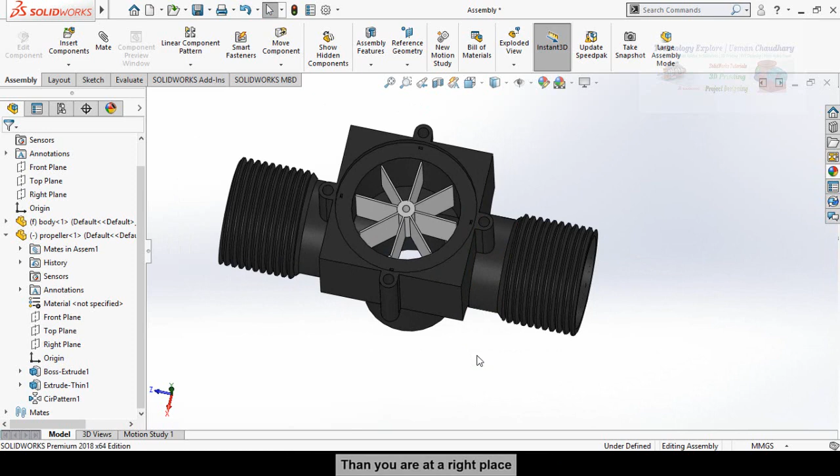My name is Usman Chaudhary, and in this video I am going to design this type of water flow sensor in SolidWorks. I had received a message on my Facebook page from a friend who wants me to make a tutorial on this topic.

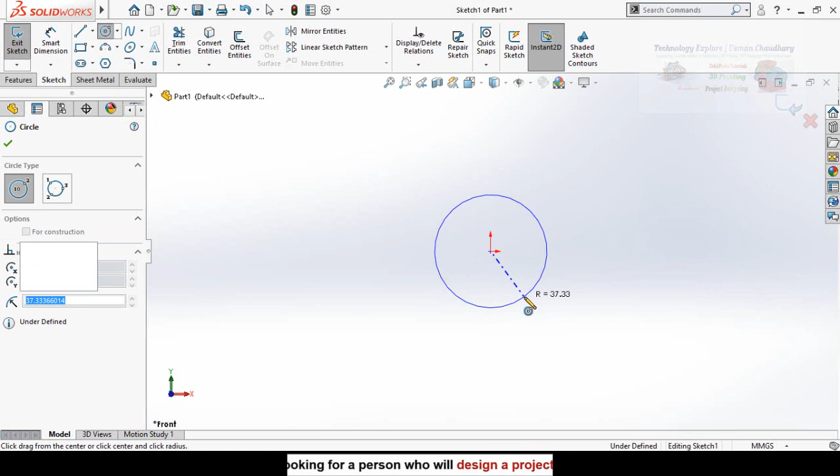Now define it, and let's say its diameter is 30 millimeters. Then go to the features tab and extrude it, up to 80 millimeters, or 100 millimeters.

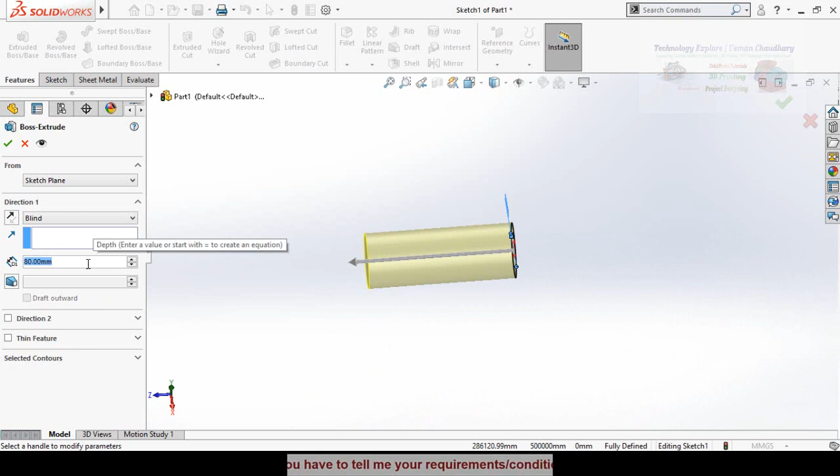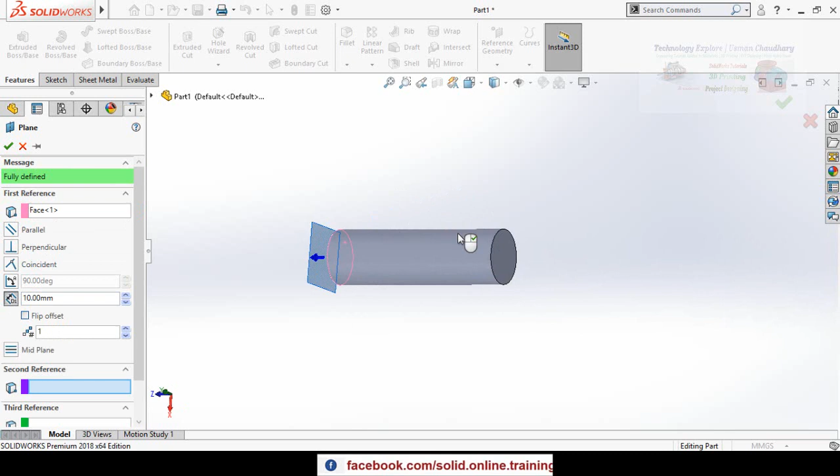Now go to reference geometry and then plane. At this moment I am going to create a plane in the middle of both these faces. First select this face as a first reference, then select this face as a second reference, then press OK.

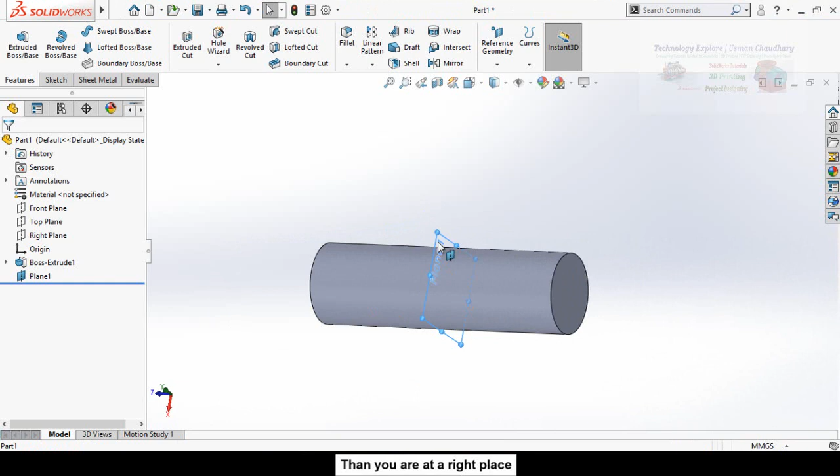Now I am going to make this cut. There are many ways to make this type of part or design this part in SolidWorks, but I will make it my own way.

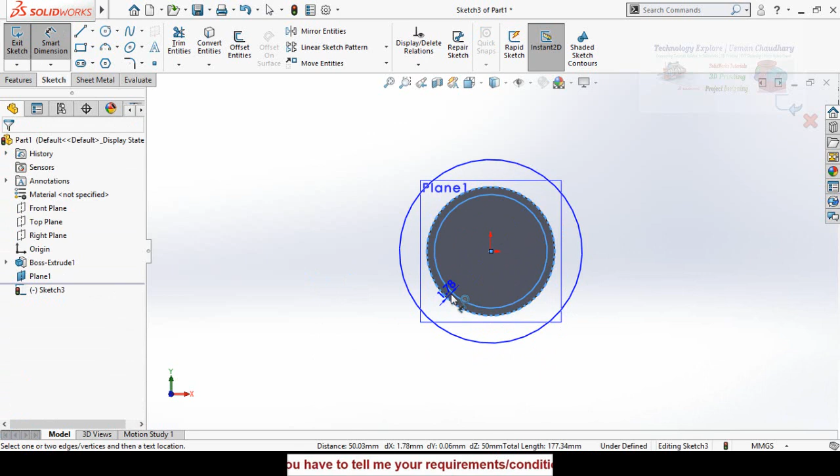So sketch on this plane 1, then make it normal, and draw two circles, one like this and the other like this. Define the internal circle as the distance between the circle and the solid part, and it should be 2 millimeters. Then define the outer circle, and it should be greater than the solid part, so instead of 30 type 35 millimeters.

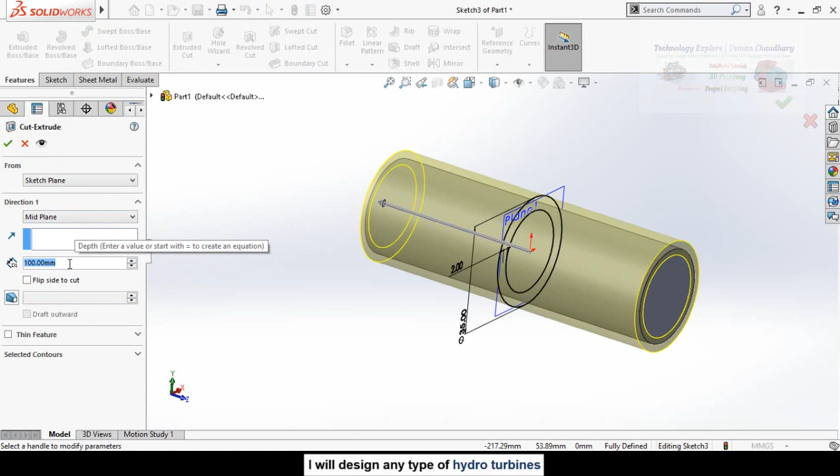Now go to the features tab and select the extruded cut command, then drop down these options and select mid plane. Type here the distance, and it is 60 millimeters. Then press OK. Now you can hide this plane.

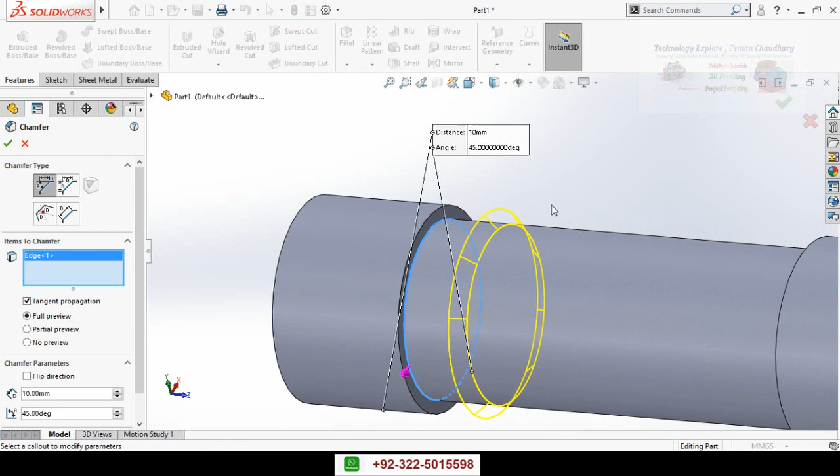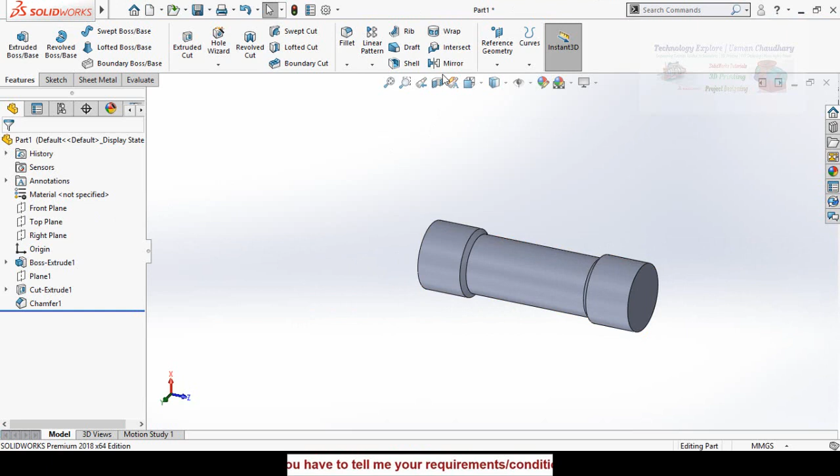Next step is to make this box. Initially I will make it a solid part. Go to SolidWorks, then click on reference geometry and then plane.

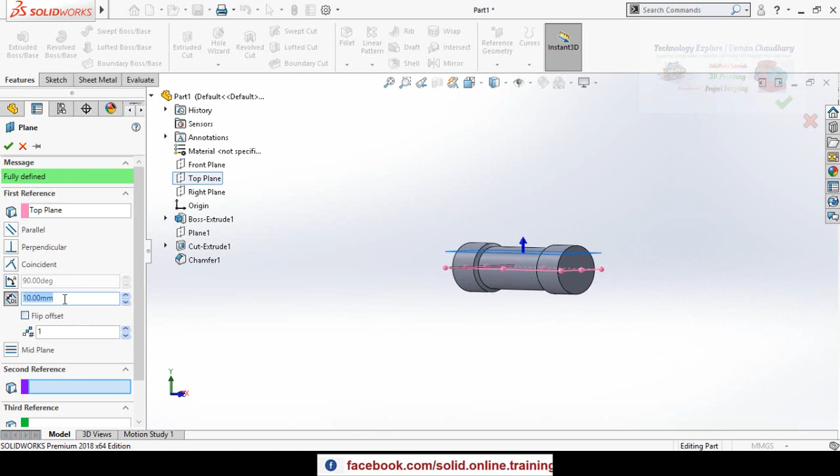Expand this tree and select the top plane as the first reference, then type the offset distance, 10 millimeters, and press OK. Now sketch on this plane 2, and make it normal by pressing Ctrl+8 on your keyboard.

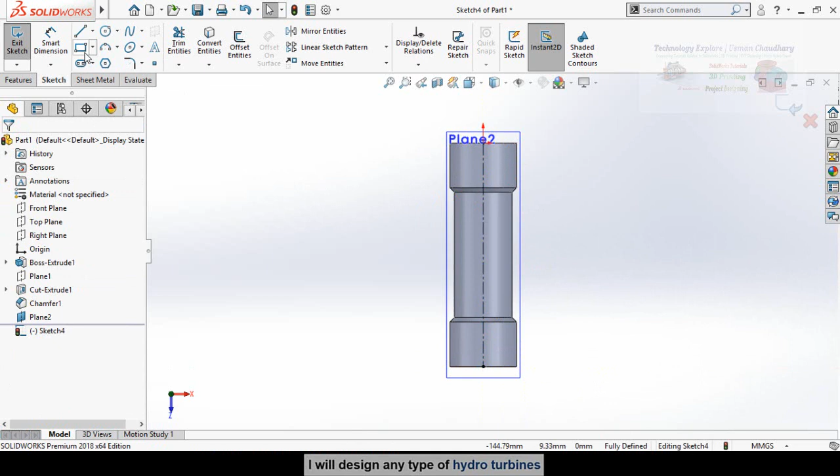Draw a center line, starting from the origin up to this line, then press escape. Now click on the arrow in front of the rectangle command and select center rectangle. Start it from this midpoint like this. As we can see in the picture, all these lines are equal, so it is a square.

Go to SolidWorks, press and hold the Ctrl key, select both of these lines, and make their relation equal. Now again define this line as 40 millimeters. So you can see our sketch is now fully defined.

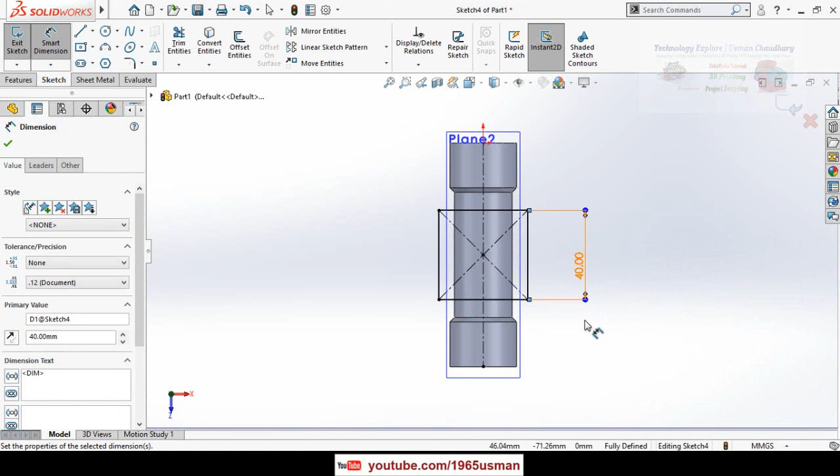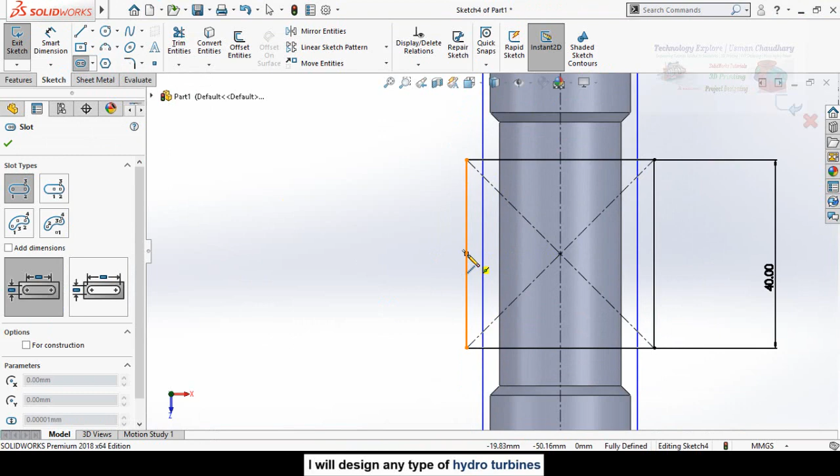Now we have to make these slots on all four sides. For that, select straight slot, zoom in, and draw a slot like this. A similar slot on this side, again on this side, and also for this side.

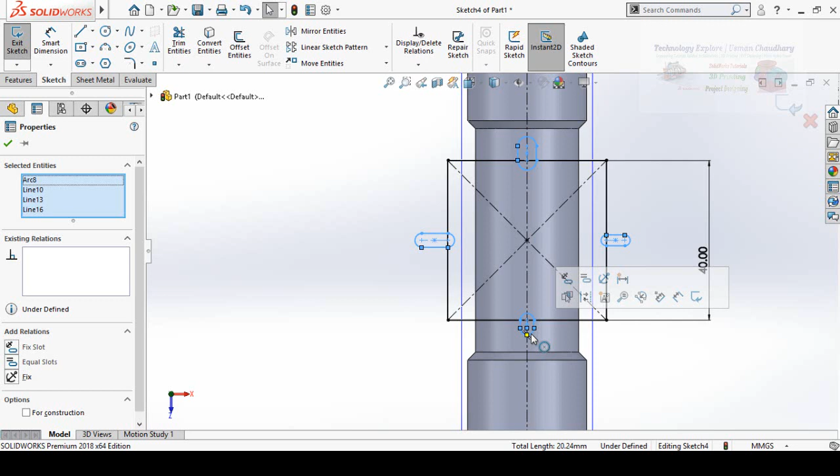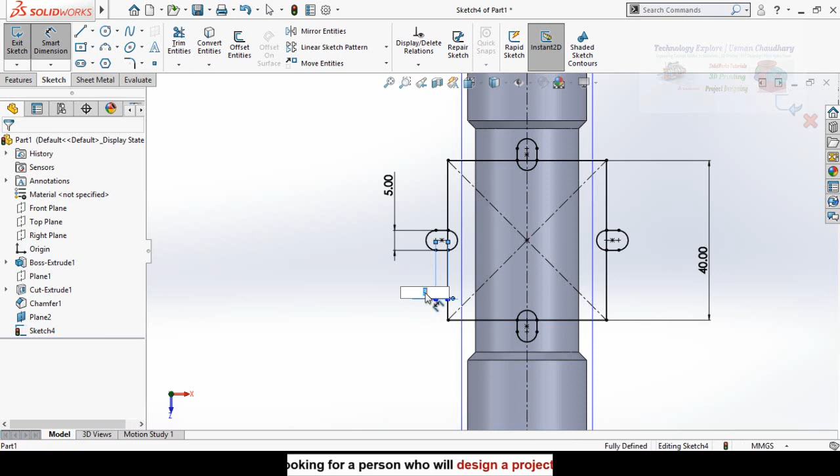Now press escape. Select all the slots one by one and make their relation equal. Then define them as 5 millimeters, this distance as 3 millimeters or 2 millimeters. Now select the trim entities command and trim like this.

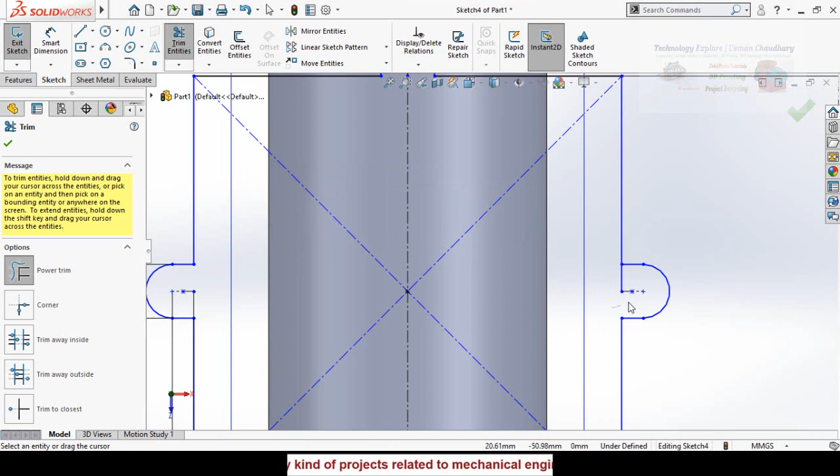Now press OK button, then go to Features tab and select Extruded Boss Base command. Reverse the direction by pressing this button and type the extrusion length to 5 millimeter. Click on this plane 2 and then hide it.

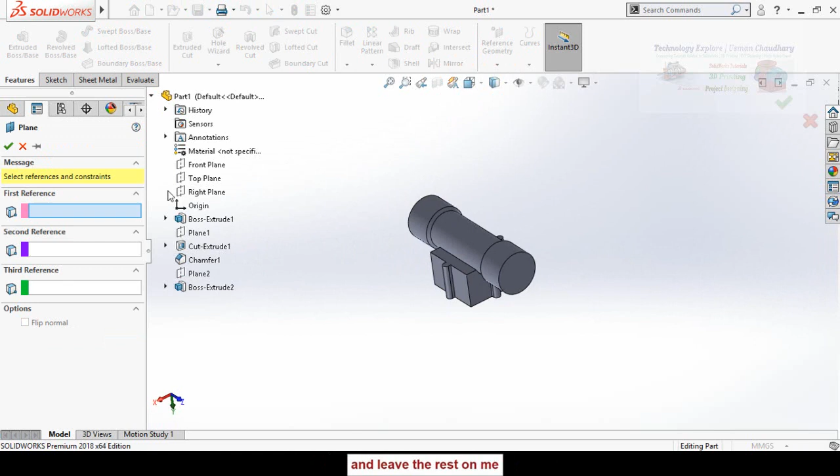Similarly, we have to make another plane on this side parallel to the top plane. For that, click on Reference Geometry and then select Plane. Expand this tree and select top plane as the first reference. Flip offset and set the offset distance to 30 millimeter. Then press OK button.

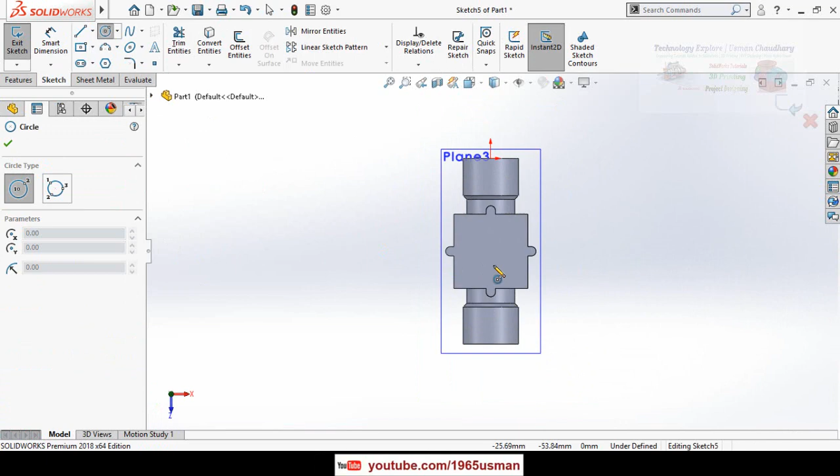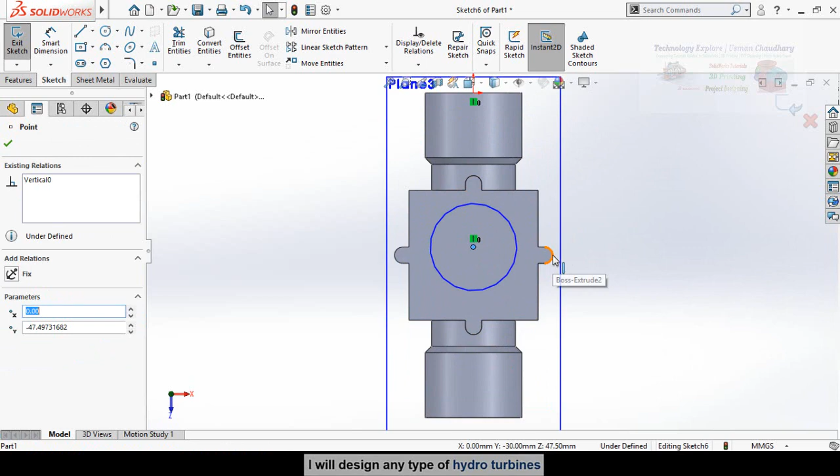Now sketch on this plane 3, make normal to it, and draw a circle like this. Press escape, select this center point and the origin, and make their relation vertical. Again select this center point and then this center point, make their relation horizontal. Now define the diameter of the circle as 26 millimeter.

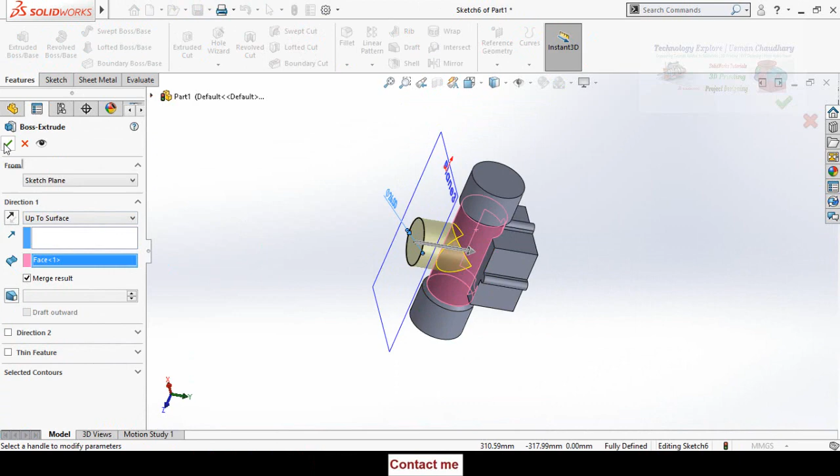Now we have to extrude it. Go to Features tab and select Extruded Boss Base command. Double click on this face and press OK button. Hide this plane 3.

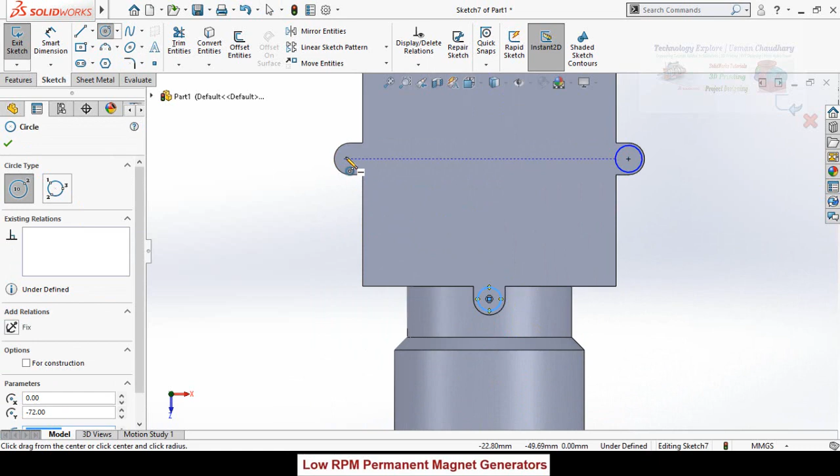So now we have to make these holes. For that, click on this face and sketch on it. Make normal to it and draw circles like this. Press escape, select all these 4 circles, and make their relation equal. Then define the diameter as 3 mm.

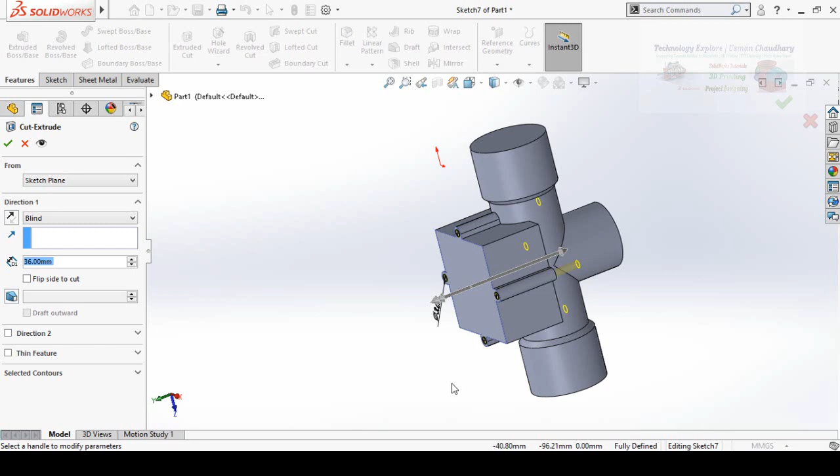Go to Features tab and select Extruded Cut command. Double click on this face and then press OK button.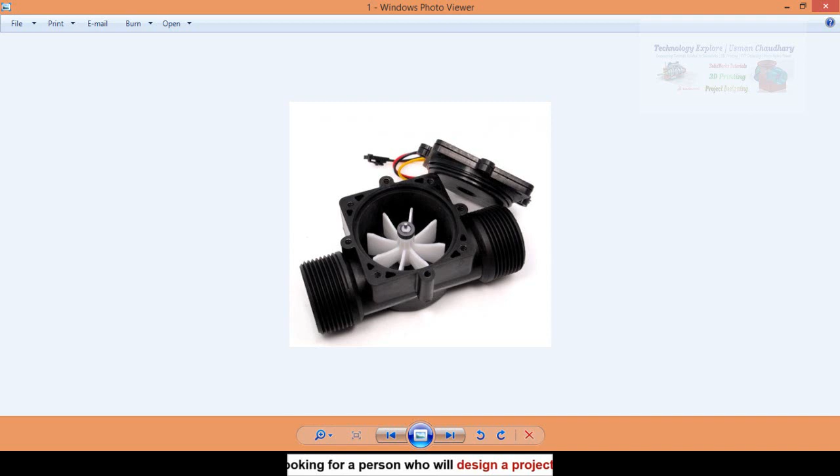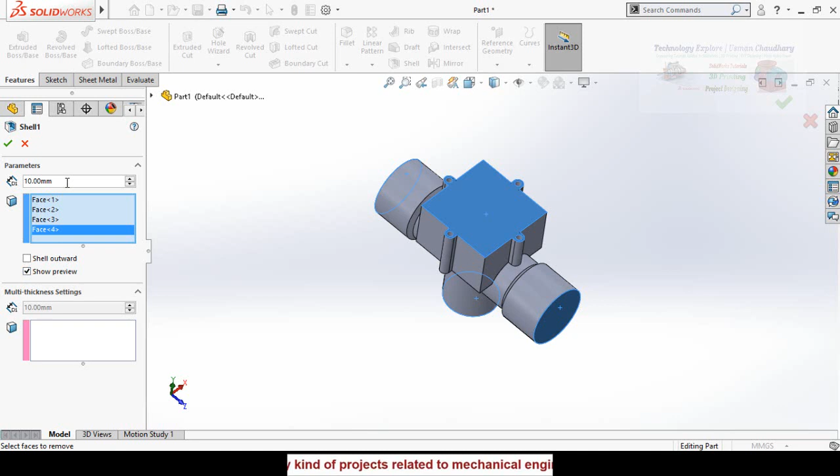Next step is to make this part hollow from inside, just like this. For that, click on Shell command, then select all these faces one by one, and check this box to show preview. Here is the shell thickness, it should be 3 millimeters or 2 millimeter. Now press OK button.

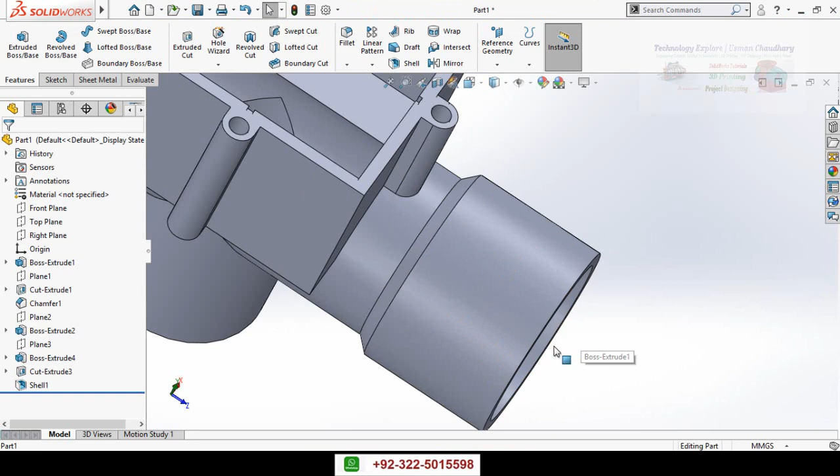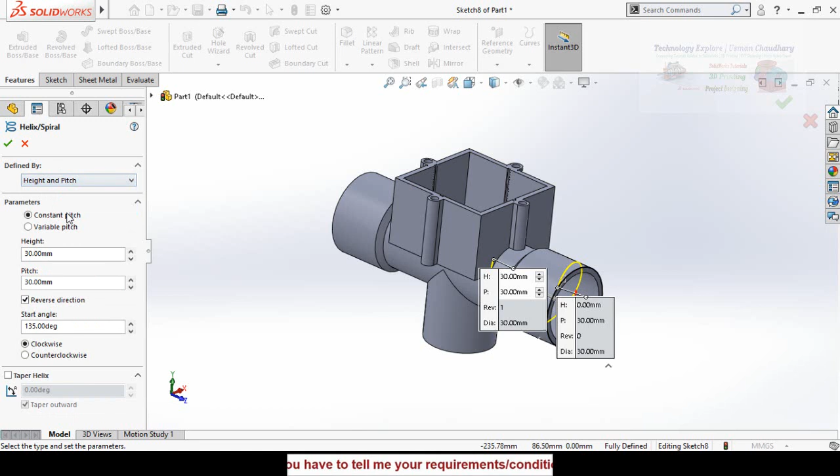Next step is that we have to cut threads on both of these sides. For that, sketch on this face, make normal to by pressing Ctrl+8, and select this circular edge. Then in the sketch tab select Convert Entities command. Go to Features tab and select Curves, then Helix and Spiral. Reverse the direction by checking this box, and from the dropdown select height and pitch. Type height 25 millimeter and pitch 2. Then press OK button.

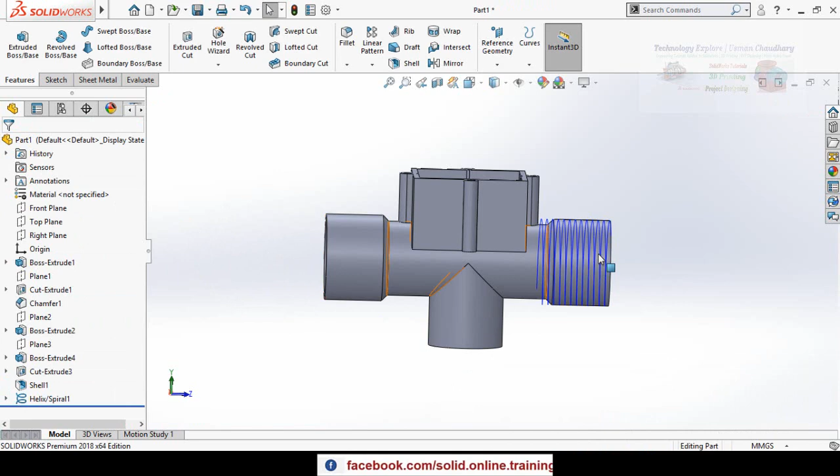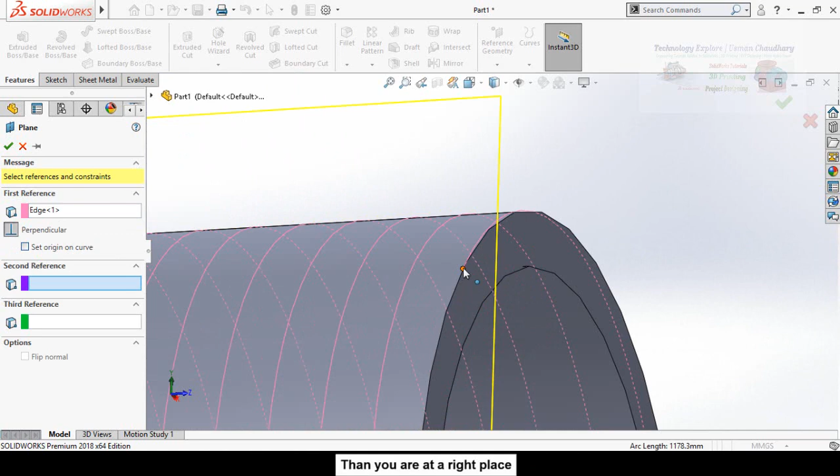Again select Reference Geometry and then Plane. Select this helix as the first reference and this end point of the helix as the second reference. Press OK button. Now sketch on this plane and make it normal to.

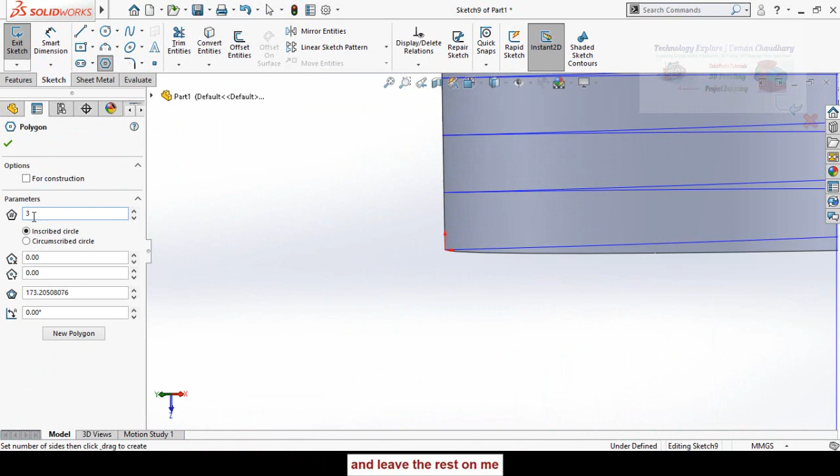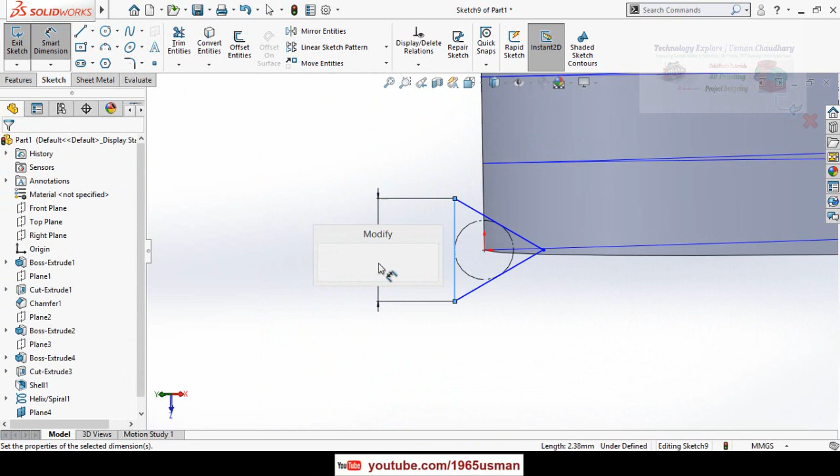Zoom in, and from here select Polygon. Number of sides is 3, and draw it on the origin like this. Now zoom in and drag this center point onto the origin. Now define this size as 2.3 millimeter. Then press this button to save and exit from sketch mode.

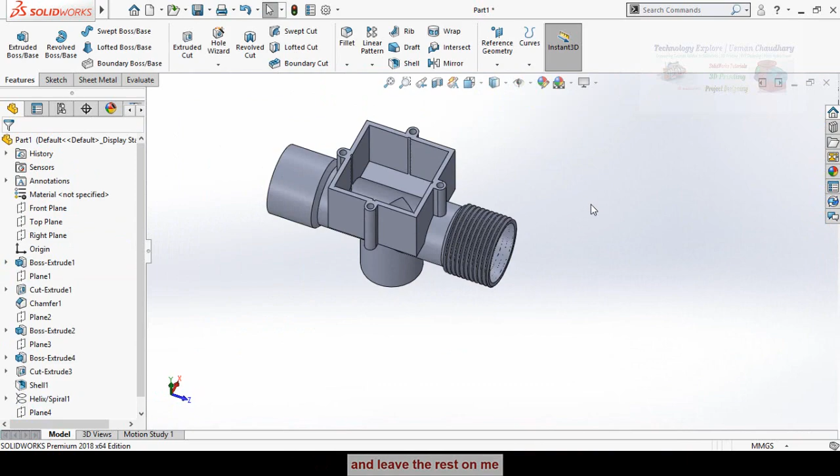Hide this plane 4. Go to Features tab and select Swept Cut command. Select this triangle as the profile and the helix as the path. Then press OK button. Hide this helix. So you can see we have cut threads on this side.

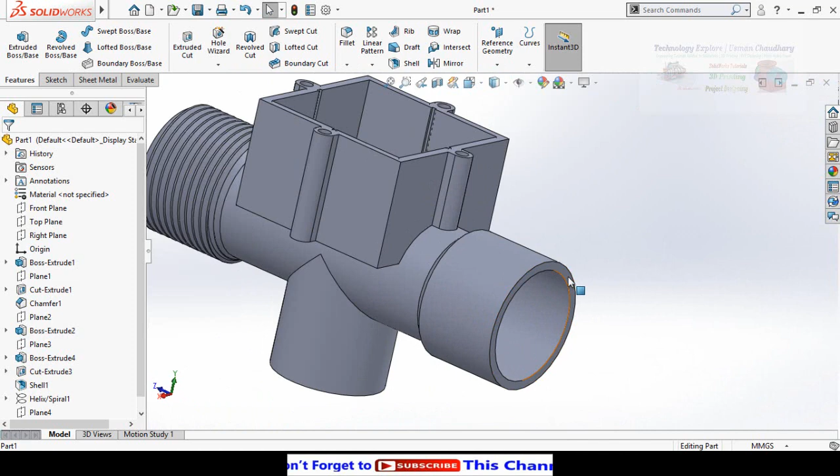Now we have to cut threads on this side, and also cut this extra material. So first of all we have to cut threads, and then we will remove the extra material.

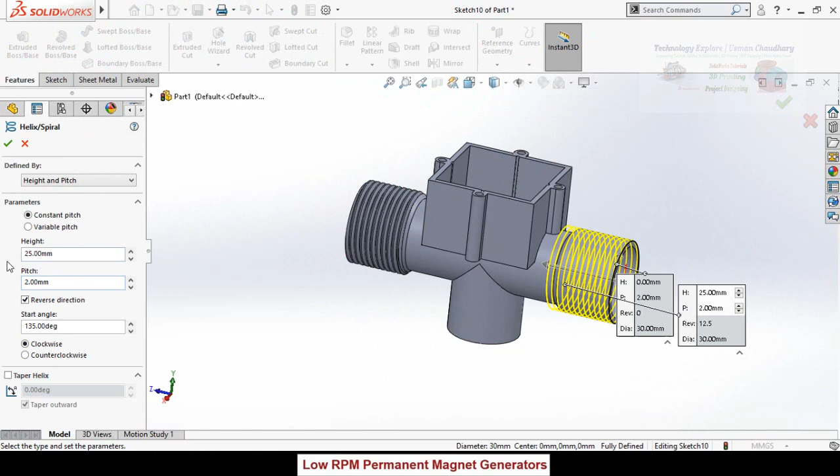Sketch on this face, make normal to, select this circle, and select Convert Entities. Go to Features tab, select Curves, then Helix and Spiral. Leave the setting as it is and press OK button. Again select Reference Geometry, then Plane. Select this helix and this end point of the helix as the second reference. Press OK button.

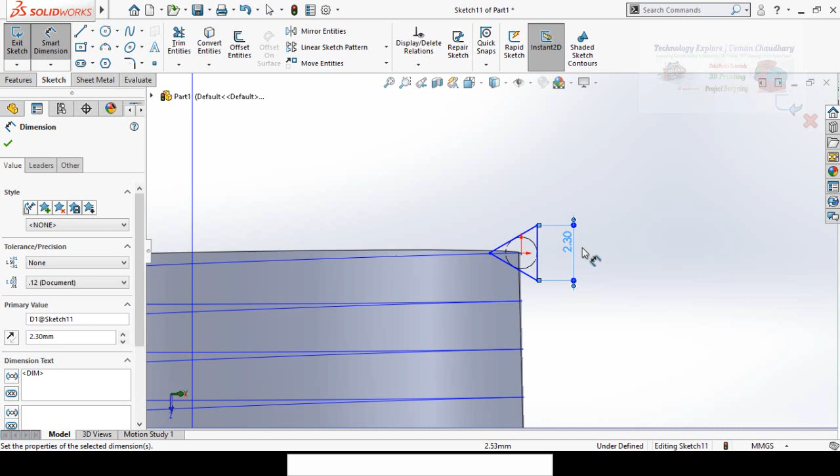Now sketch on this plane, make normal to it, and draw a triangle using this Polygon command. Sides are 3, on the origin, like this. Define it as 2.3 millimeter. Save and exit from sketch mode.

From Features tab, select Swept Cut command. Select this triangle as the profile and this helix as the path. Then press OK button. Now hide this plane 5, and also hide the helix.

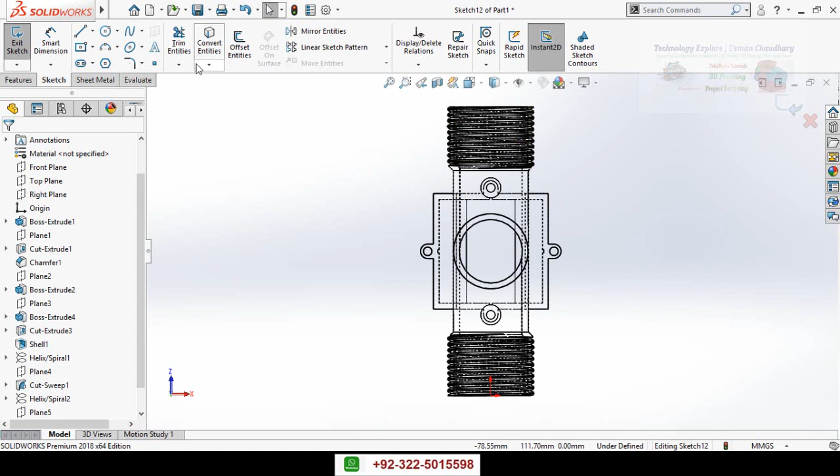Now click on this face and sketch on it. Make normal to by pressing Ctrl+8. Then change the shades, and select Circle and draw it on this center point. Also draw one circle on this center point, like this. Now you can change the shades again.

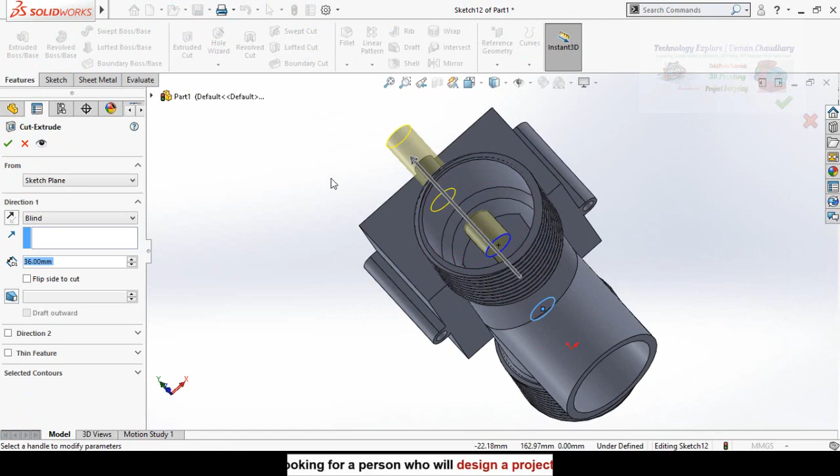Then go to Features tab and select Extruded Cut command. Double click on this face. As you can see, the extruded cut direction is in this side, so we have to reverse the direction by pressing this button, and then press OK button.

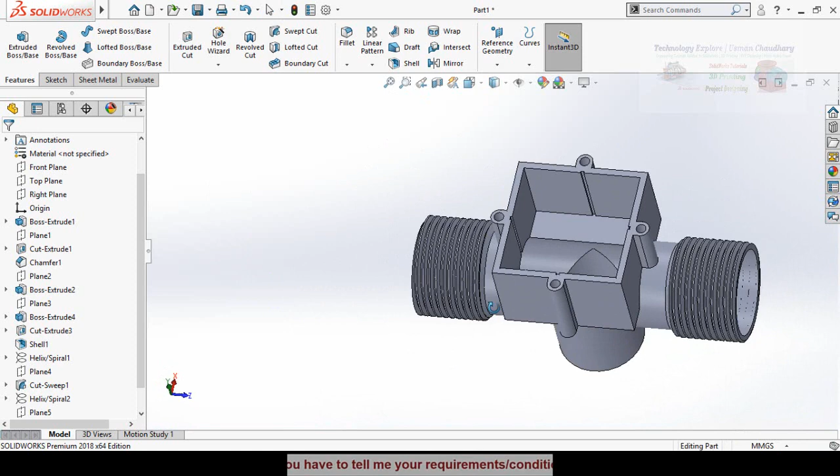So the next step is that we have to make this part like this.

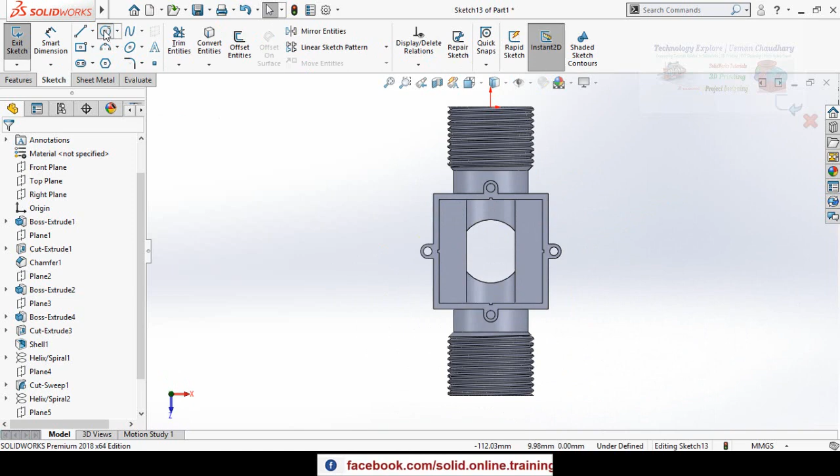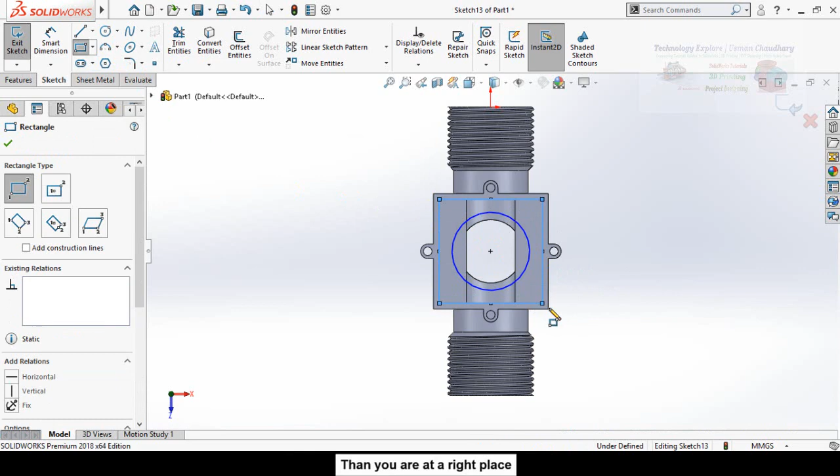So again, sketch on this face, make normal to, and then draw a circle on this center point, like this. Then press escape button. From here select rectangle, corner rectangle, and draw it from this point up to this point. Define the

diameter of circle as 25 millimeter. Press OK button and then go to features tab. From here select extruded boss base command. Then double click on this face. Press OK button.

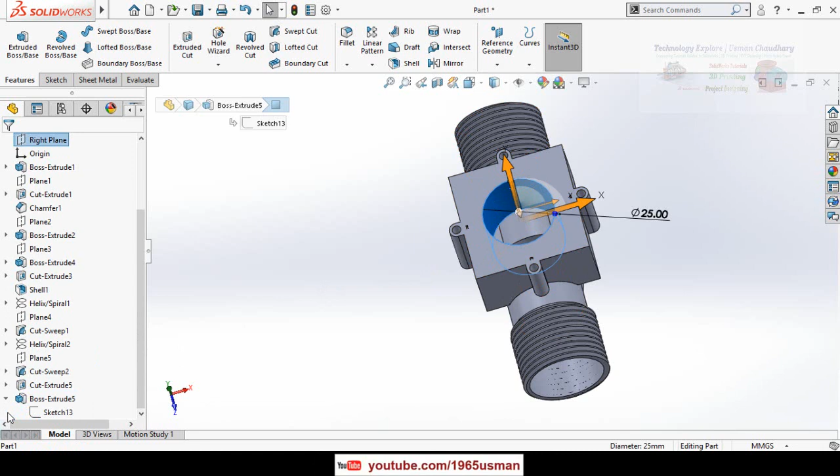So now I think we have to increase the diameter of this circle. For that, on the left side expand the boss extrude 5, and from here click on this sketch 13 and edit sketch. Instead of 25, type here 30 millimeter. So now you can see we had created the internal circle of this diameter.

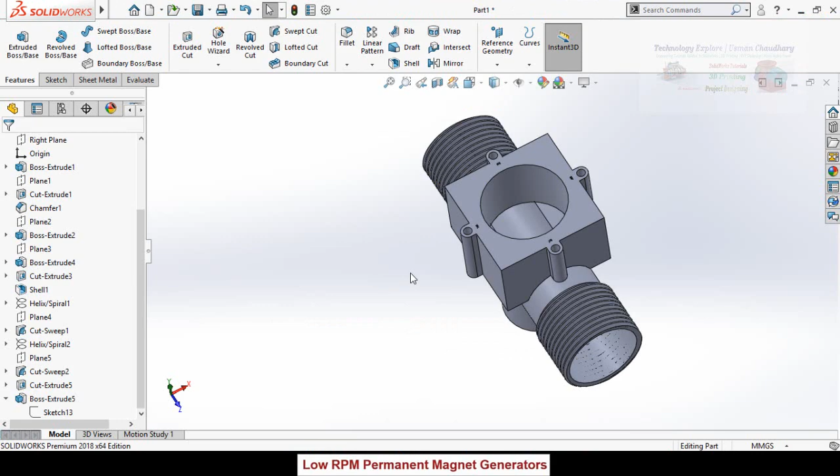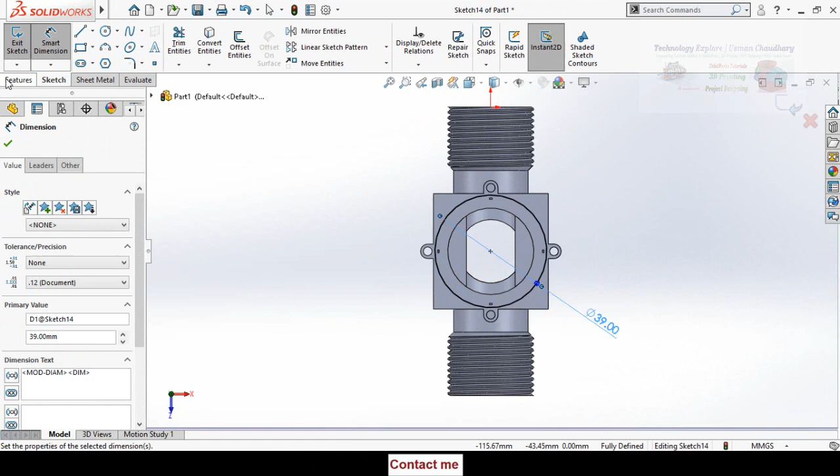Now we have to make a small cut for this seat. Again go to SolidWorks and then sketch on this face, make normal to, and draw another circle on this center point, like this. Now define the diameter of this circle as 39 millimeter. Then go to features tab and select extruded cut command. Type here the extrusion length 2 millimeter and press OK button.

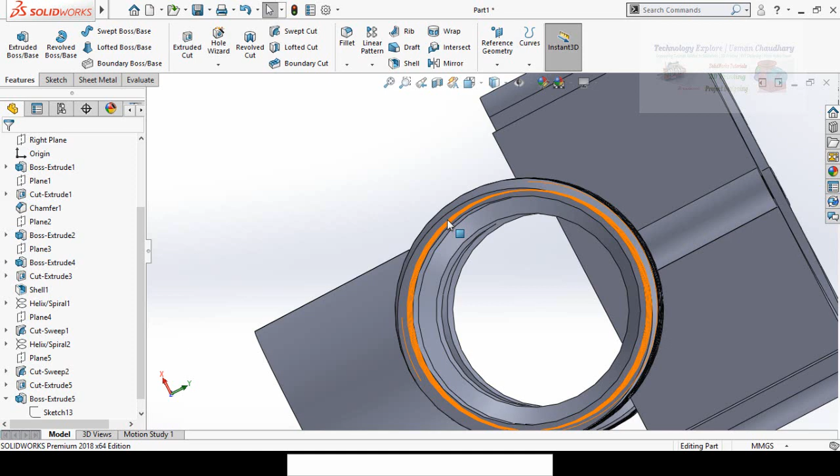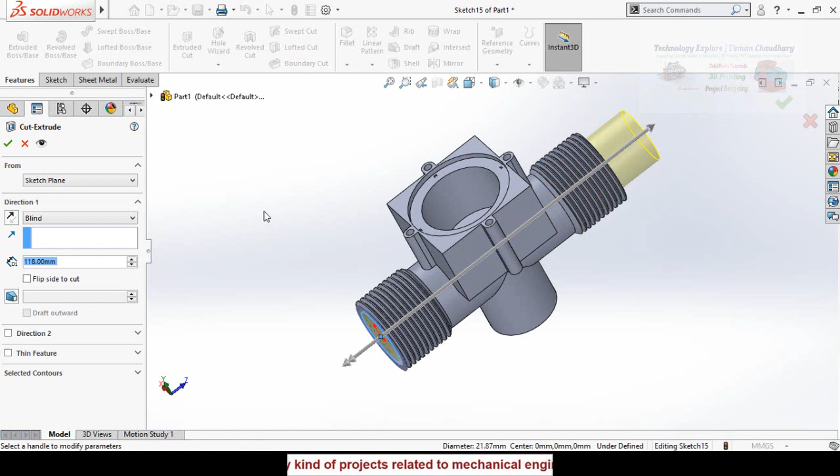Now again sketch on this face, make normal to, and draw a circle like this. Go to Features tab and select Extruded Cut command. Click and drag this arrow like this and press OK button.

So next step is that we have to make the propeller. For that, again start from a new part, then select front plane and sketch on it.

Draw two circles, define the diameters of both. So the internal circle has the diameter of 2 millimeter and external has 5 millimeter. Go to Features tab and then extrude it up to 5 millimeter and press OK button.

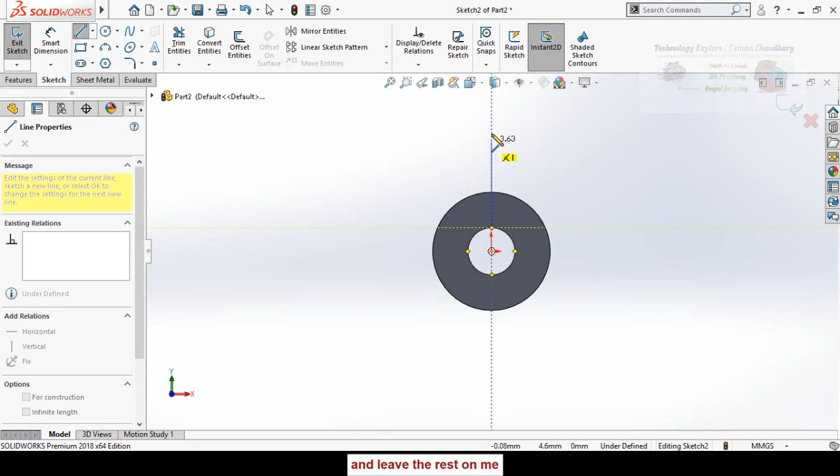Now again select this face and then sketch on it. Make normal to and then draw a line. Start it from this quadrant point. Now define the distance from origin up to this point. This distance is 29 divided by 2.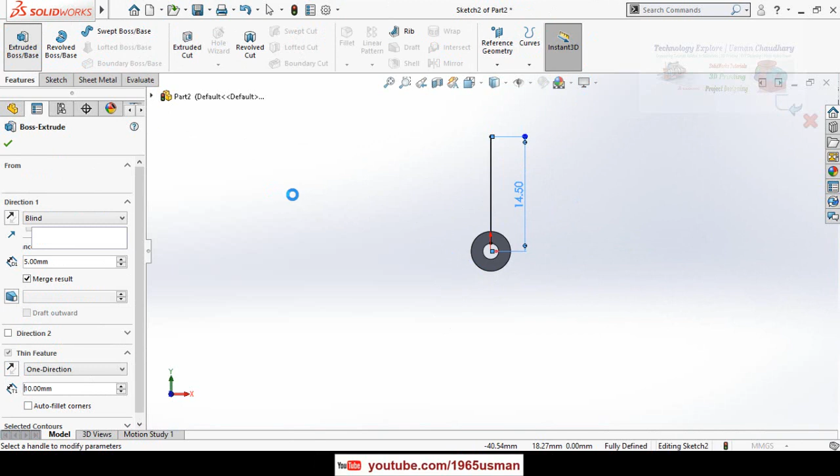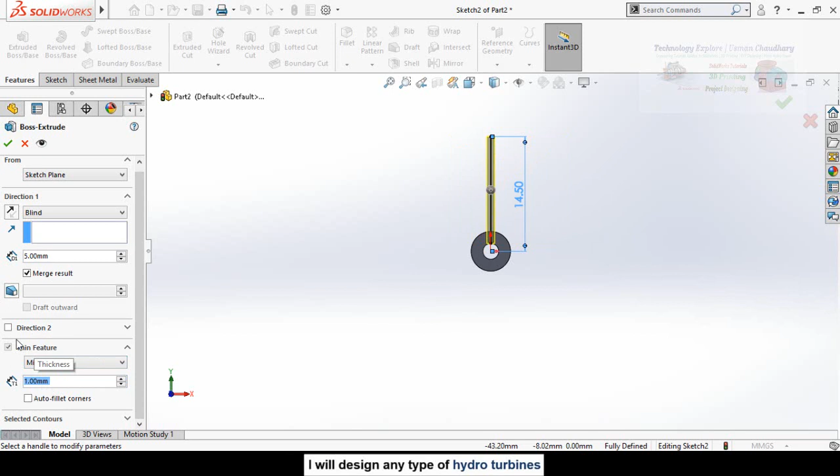Now go to Features tab and select Extruded Boss/Base command. From here you can see the thin feature option is automatically checked. So drop down this option and from here select mid plane. Type here the thickness of the wall, and it is 1 millimeter, or instead of 1 it should be 0.5 millimeter.

Now rotate the view and then double click on this face. Then press OK button. Go to Features tab again and from here click on this arrow below the linear pattern and from here select circular pattern.

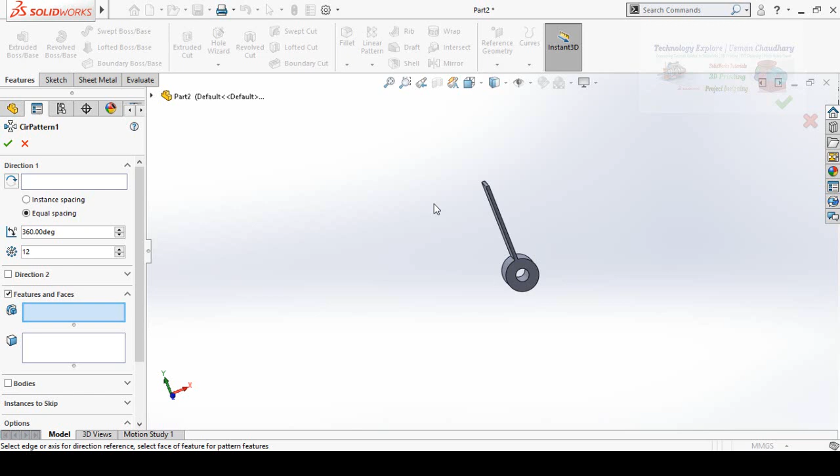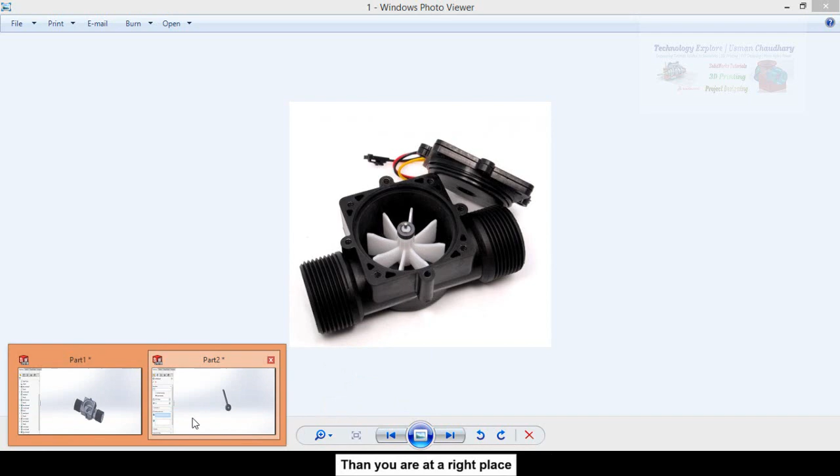Expand this tree and from here select Extrude Thin 1 as the features and faces to be patterned. Then click on this box pattern axis and select this circle. Now type in the quantity 8 and press OK button.

So the propeller has been designed. Save it. Also save this part.

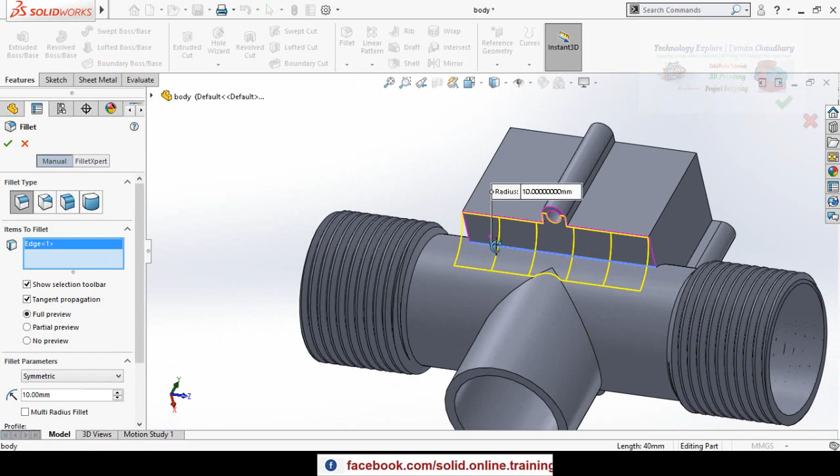Now rotate the view orientation and then select fillet command. Select this line, also this line. Specify the fillet radius and it should be 10 millimeter and then press OK button.

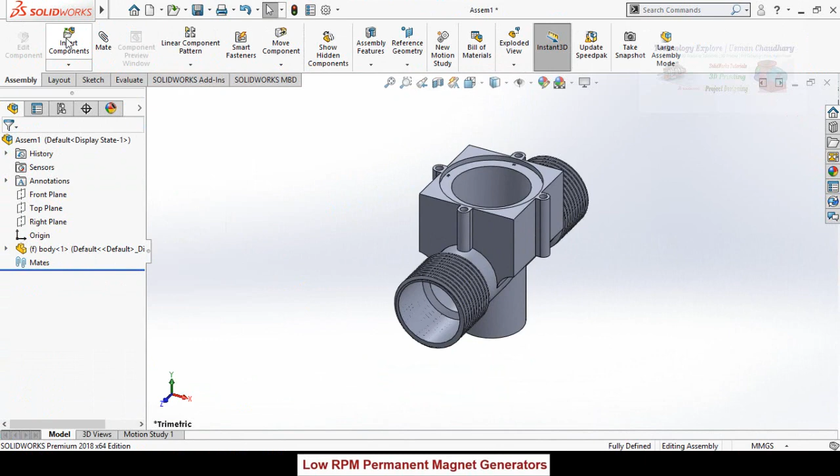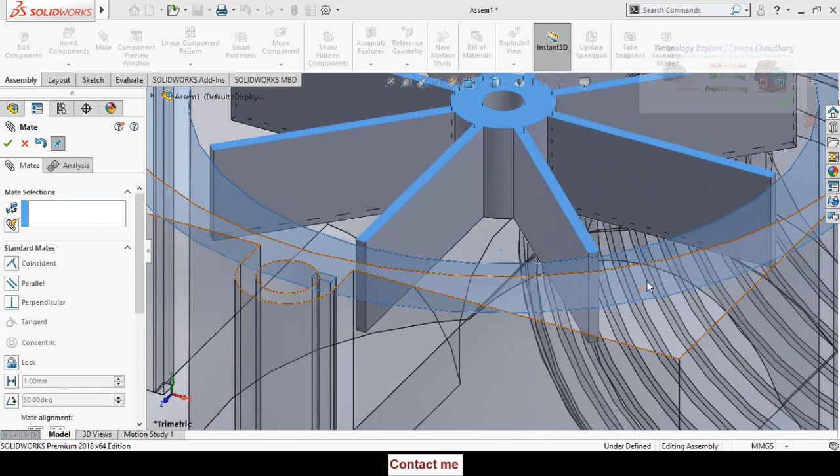Now start from a new assembly and then import both of these parts in the assembly. Click on this cylindrical face and then select mate, then select this cylindrical face and press OK button. Now select this face and this face and press OK button. Again press OK button.

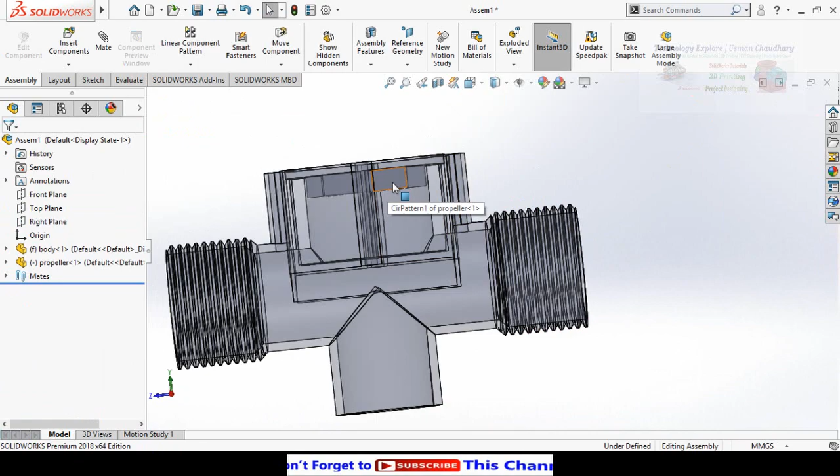Now click on this part and then select change transparency. So we have to increase the length of this propeller. So we can also edit our parts in the assembly. For that, click on the part that you want to edit and then select edit part. So now select save and continue.

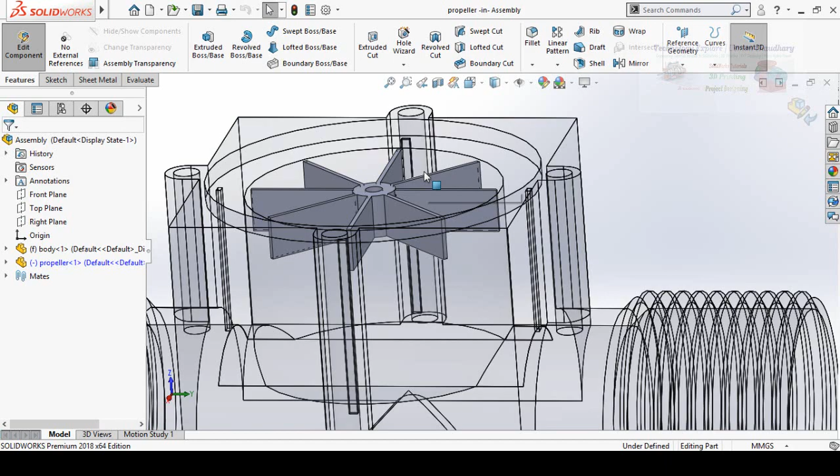Now I want to increase the length of this part, the propeller. So for that, expand the propeller part from here and then scroll down. Now click on this Boss-Extrude1 and edit feature. Instead of 5 millimeter, type here 15 millimeter and then press OK button.

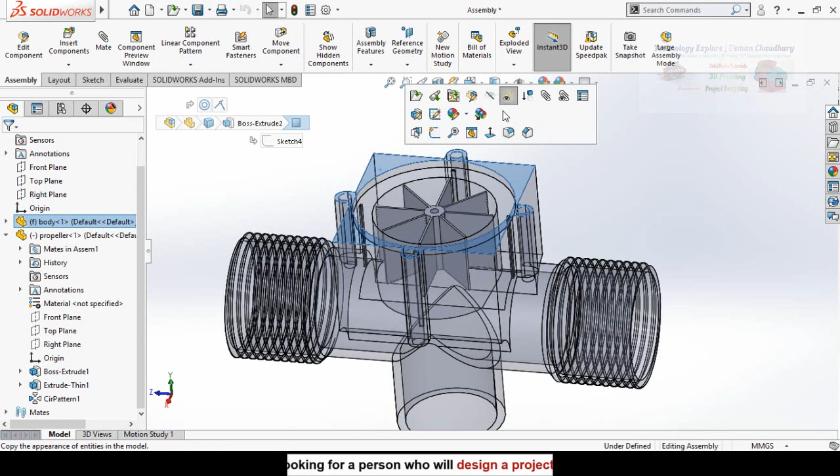Now press this button to save and exit from part editing mode. Then click on this button, rebuild. Now click on this part and select change transparency.

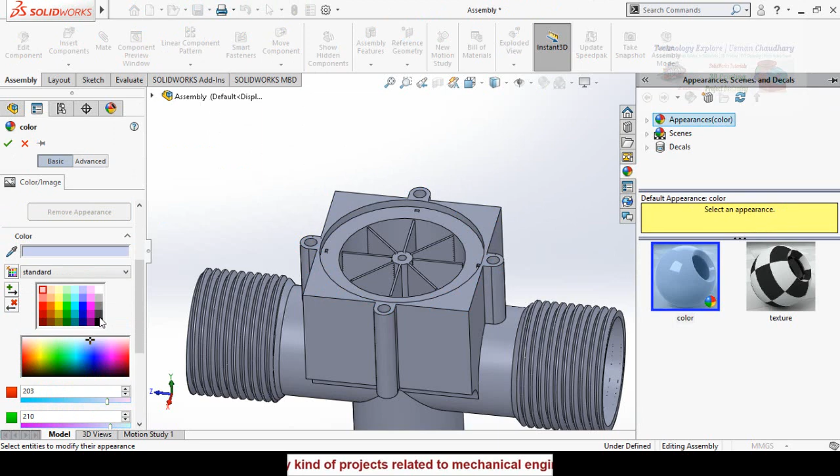So now we have to change the colors of these parts. So click on the part and then select appearance. From here select body. Select black and press OK button. Now select this part, propeller, and then select from appearance propeller, select white, and press OK button.

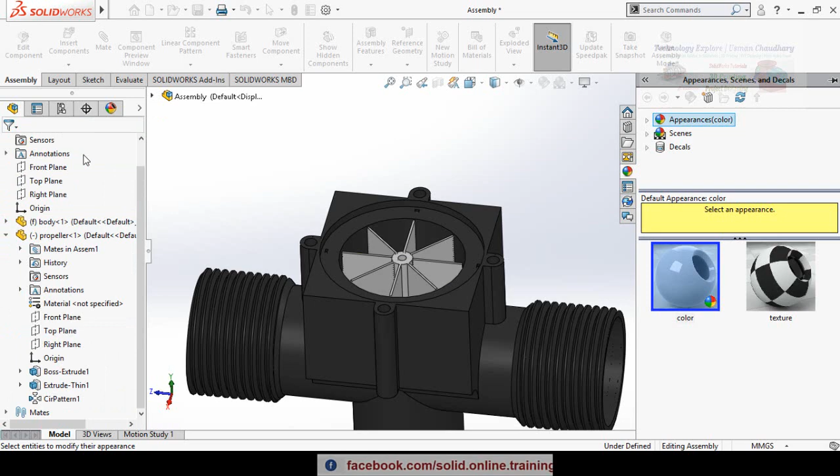You can also rotate this propeller in the assembly. So this is how we can make this type of part in SolidWorks.